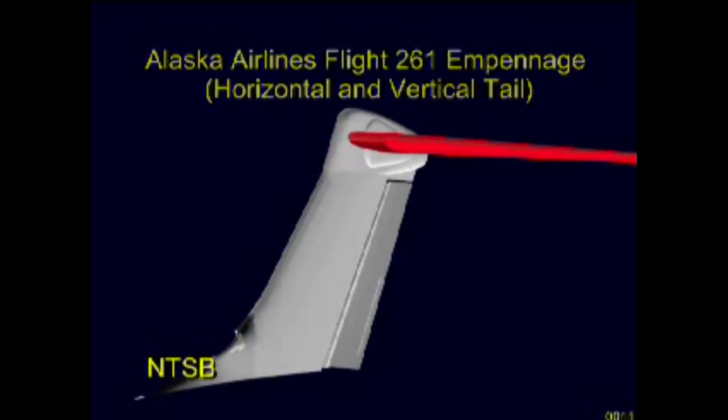The horizontal stabilizer is mounted on top of the 18-foot high vertical stabilizer in a T-tail configuration. The horizontal stabilizer has a span of about 40 feet and comprises a center box and a left and right outboard section. In this animation, only the left outboard section is shown.

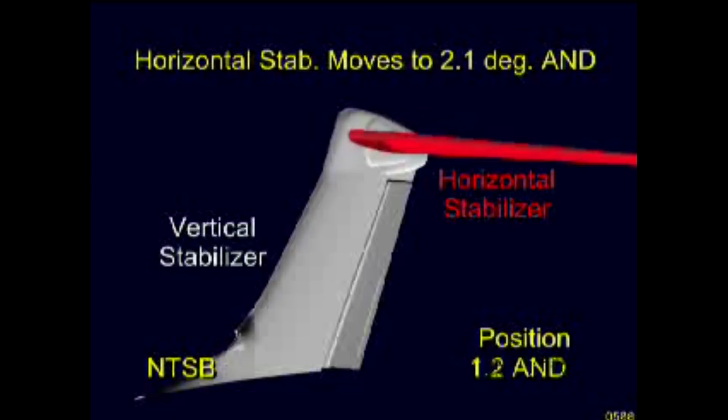The leading edge of the horizontal stabilizer can be raised or lowered as the entire surface pivots about its hinge points. The stabilizer's normal limit of motion upward is 2.1 degrees. This upward motion tends to pitch the airplane's nose down, abbreviated by the letters A N D. The normal limit of motion downward is 12.2 degrees, which tends to pitch the airplane's nose up, or A N U.

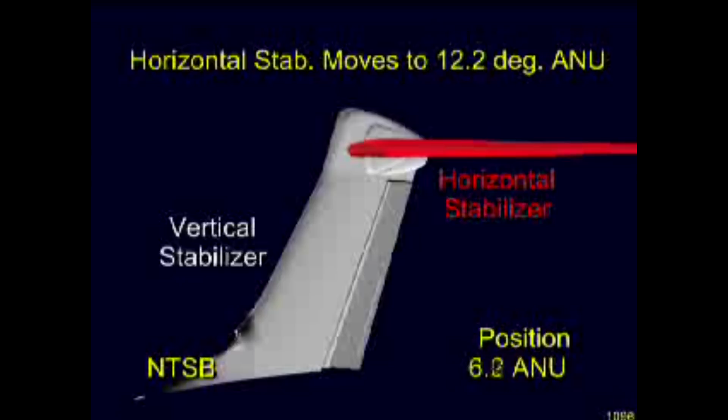Here you see the stabilizer move throughout its full range of motion before returning back to its neutral, or 0-degree position. For the purposes of this presentation, the speed of the stabilizer shown here is twice that of actual operation. The horizontal stabilizer is connected to the vertical stabilizer by hinges at its aft spar and with a single jack screw actuator assembly at its front spar near its leading edge.

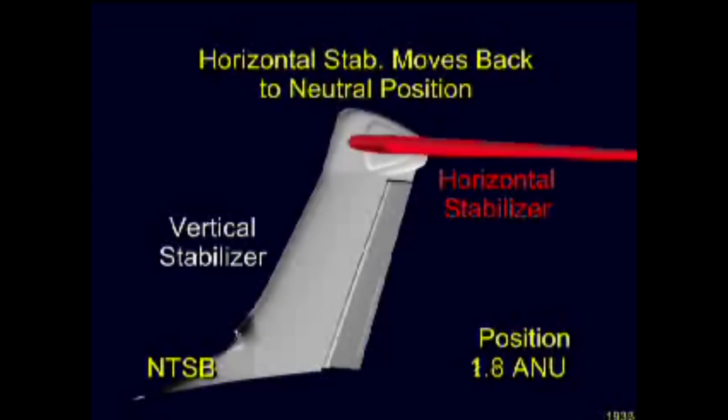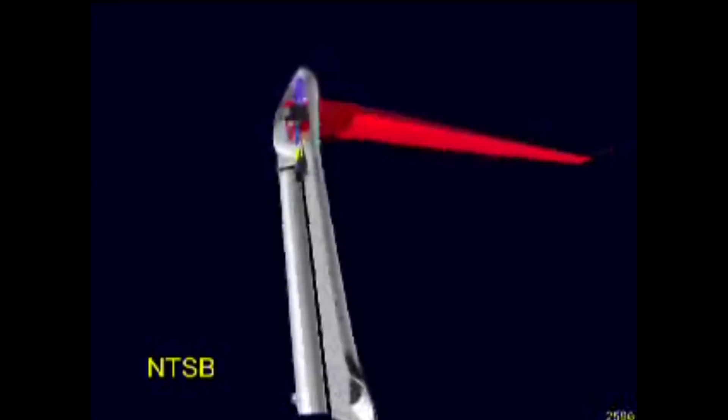The animation will now provide a cutaway view of the tail assembly so that you can view the actuating mechanism for the horizontal stabilizer. As the view shifts, let me take this time to inform you that movement of the stabilizer can be commanded either automatically by the autopilot or manually by the flight crew. Any of these commands activates either the primary or alternate trim motor, shown here in purple.

The motors are connected to a gearbox, shown in black, which is needed to rotate the Acme screw, shown in blue, by applying a torque to a titanium torque tube that is held fixed inside the screw. The upper end of the jack screw assembly is attached to the horizontal stabilizer, and the lower end is threaded through the Acme nut, shown in yellow, which is attached to the vertical stabilizer.

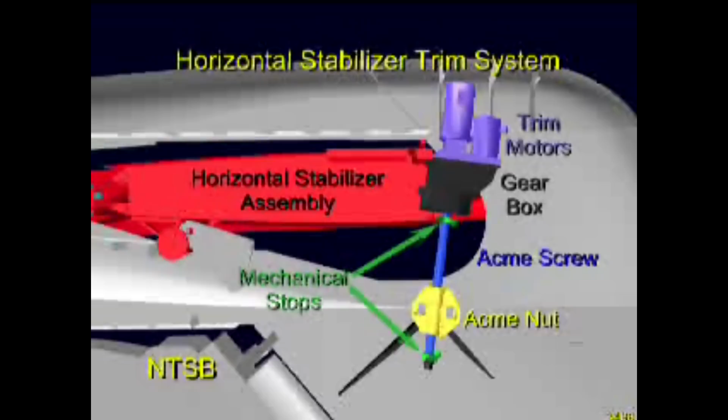The jack screw assembly also has upper and lower mechanical stops, shown here in green, attached to the screw to stop screw rotation in case of a malfunction of the normal electrical shutoff controls. The entire jack screw assembly is covered by a tip fairing on top of the vertical stabilizer. This fairing is attached with brackets that I will mention later in this presentation.

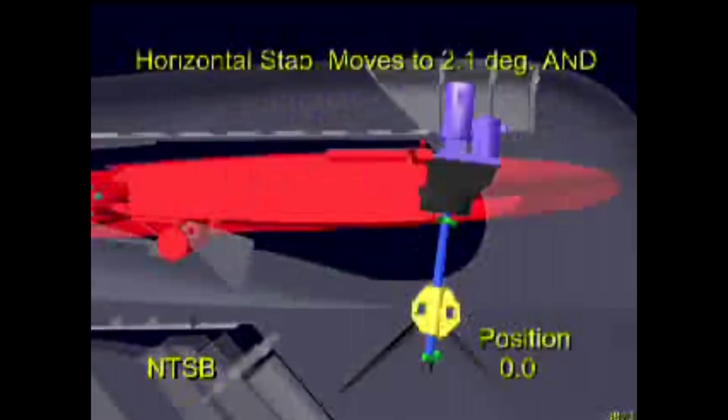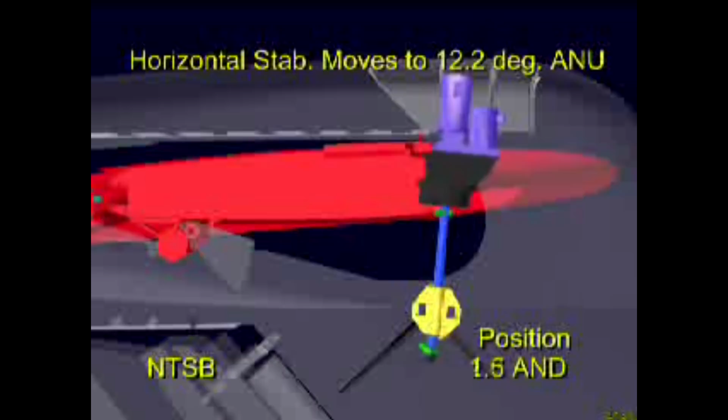As the animation shows the stabilizer moving toward its upper and lower limits of travel, you'll notice that the rotation of the screw through the non-moving nut causes the screw to translate upward and downward. This rotation between the case-hardened steel screw and the softer aluminum bronze nut gradually wears down the thickness of the nut threads. It is important to note here that the Acme nut is, by design, the wearing component in this system. Therefore, frequent lubrication is needed to minimize the rate of nut thread wear in order to maintain the expected wear rate of about 1/1000th of an inch per 1,000 flight hours.

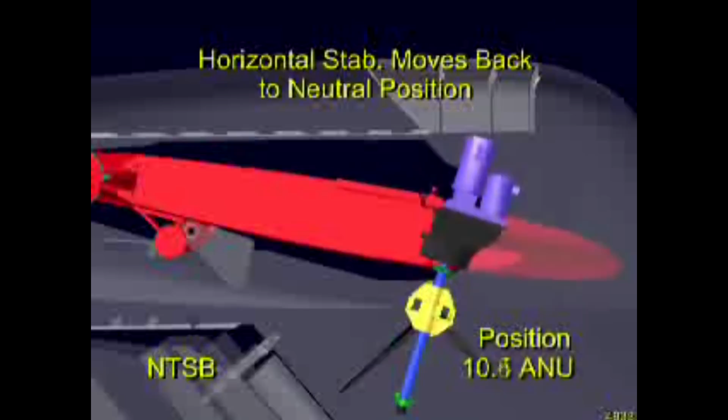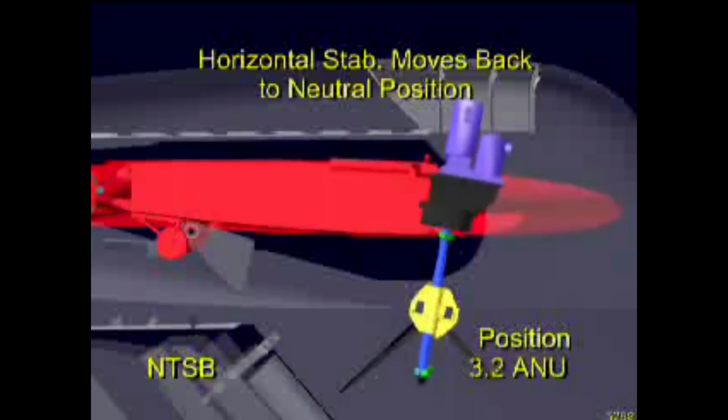Additionally, a periodic inspection procedure to monitor this wear is also required. This inspection is known as the end plate check, and if the wear exceeds 40 thousandths of an inch, then the jack screw assembly is to be replaced. These maintenance and inspection requirements will be discussed in detail later in this meeting.

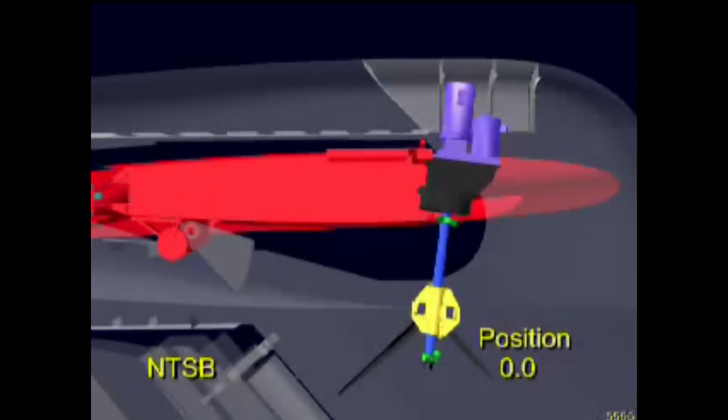The animation will now depict the system operation and sequence of failures that occurred during the accident flight. Flight data recorder information indicated that the accident airplane's longitudinal trim control system was functioning normally during the airplane's descent and landing into Puerto Vallarta on the flight just before the accident flight. Later, while preparing for takeoff from Puerto Vallarta, the accident flight crew had trimmed the airplane to a 7-degree airplane nose up position, as you see here.

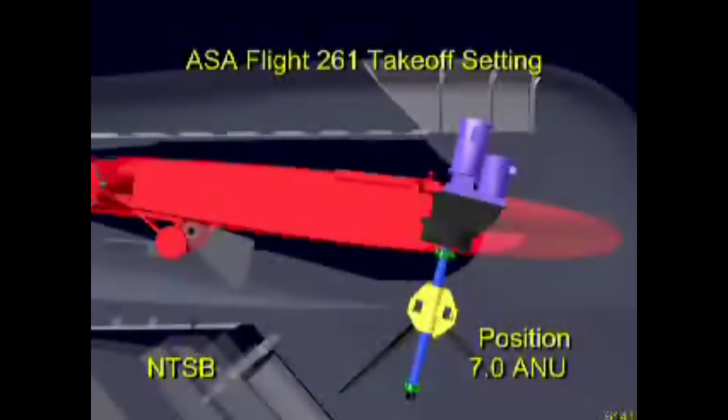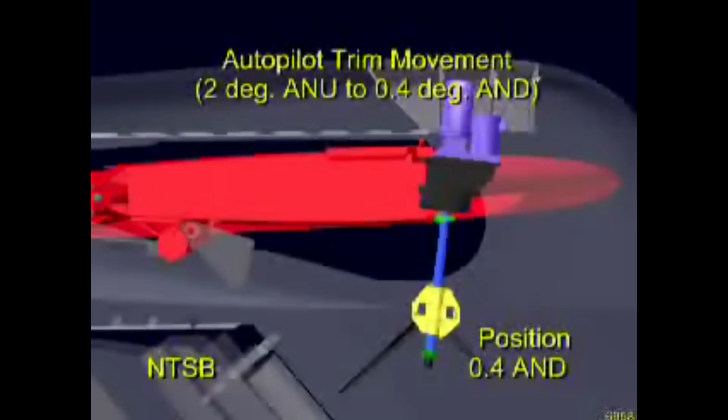As the airplane was climbing out after takeoff, the horizontal stabilizer moved at the normal primary trim motor rate of 1/3 of a degree per second from 7 degrees to 2 degrees airplane nose up. Thereafter, as the airplane continued to climb through 6,200 feet, the stabilizer moved at the normal alternate trim motor rate of 1/10 of a degree per second from 2 degrees airplane nose up to 0.4 degrees airplane nose down. Operation of the alternate trim motor during this period is consistent with use of the autopilot.

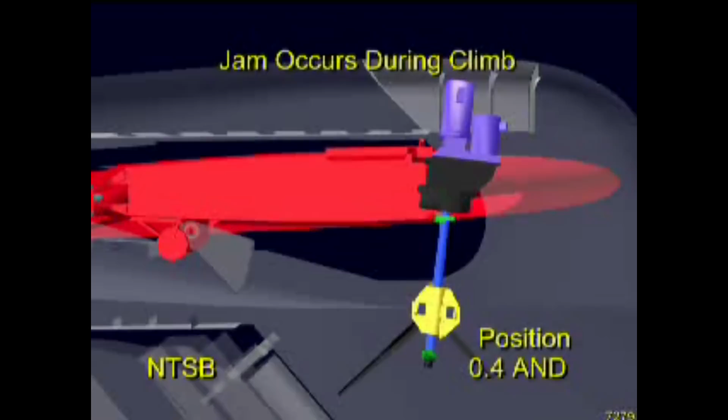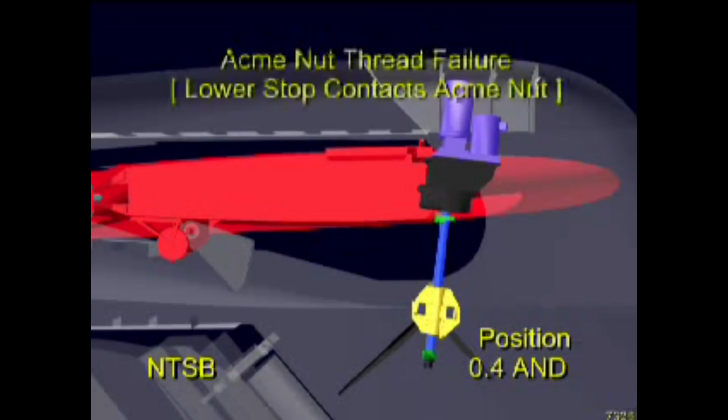Again, for the purposes of this presentation, the alternate trim motor speed of the stabilizer shown here is twice that of actual operation. As the airplane continued to climb through about 23,000 feet, the stabilizer stopped moving at the 0.4 degree position. This cessation of stabilizer movement is consistent with a mechanical jam. Evidence suggests that this jam occurred due to the deteriorated condition of the Acme nut threads that resulted from a lack of lubrication. 2 hours and 20 minutes after this jam occurred, immediately after the autopilot was disconnected by the flight crew with the activation of the primary trim, the stabilizer traveled from its jammed position to about the 3.1 degree airplane nose down position.

Aircraft performance and kinematic analyses indicate that the severely worn threads of the Acme nut stripped out at this point, allowing the Acme screw to be pulled upward through the nut until the lower surface of the Acme nut contacted the lower mechanical stop on the Acme screw. The airplane entered the initial dive as the stabilizer moved. The lower mechanical stop and the torque tube that was connected to it was not designed to withstand the aerodynamic loads produced by the horizontal stabilizer.

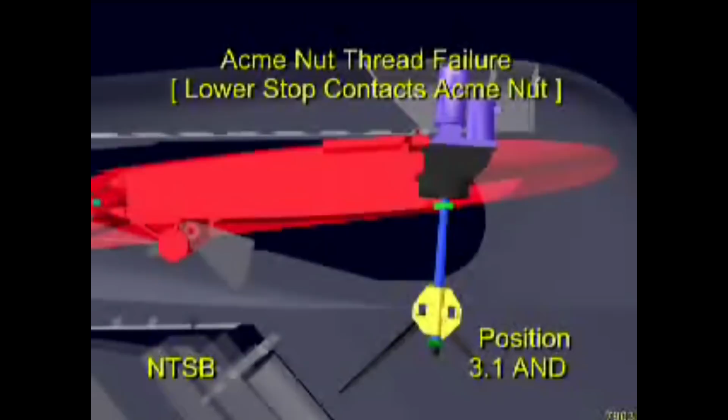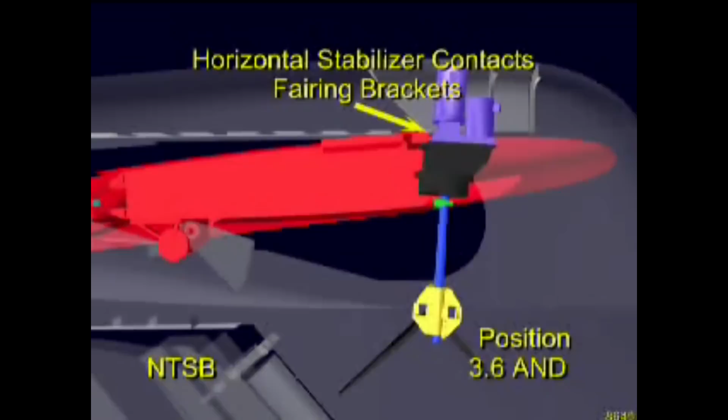About 8 minutes later, after the airplane had recovered from the first dive, the torque tube and lower mechanical stops separated. The horizontal stabilizer moved upward from the 3.1 airplane nose down position to about a 3.6 airplane nose down position, where it contacted the fairing brackets that were attached to the structure of the vertical stabilizer. These brackets were never designed to carry the tail loads. Several seconds after the horizontal stabilizer contacted the fairing brackets, the brackets failed, releasing the horizontal stabilizer. The resulting upward movement of the horizontal stabilizer's leading edge caused an uncontrollable downward pitching of the airplane from which recovery was not possible.